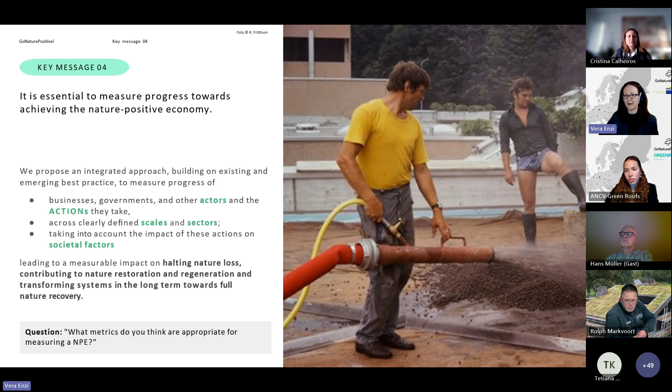So here we would be asking you, what metrics do you think are appropriate for measuring a nature positive economy? Because maybe you also have some further ideas on how metrics could be designed. What we came to basically was that measures and their progress can be looked at from a top-down scanning of metrics and nature positiveness of the economy, but can also be measured by a bottom-up interpretation of nature positiveness and useful metrics. So we are proposing that both ways are necessary.

Yes, some examples how that actually could work. So most of you will be familiar with the SDGs and also, for example, the Task Force on Nature-related Financial Disclosures, maybe also the donut economy concept.

What the nature positive economy concept we are proposing distinguishes from the mentioned examples is that we are proposing a whole of society approach, and not just a sectoral or limited action in scale or actors. So last but not least, the last key message is about the whole of society approach.

A nature positive economy will require legislation to stop environmentally harmful activity and support nature positive actions, alongside voluntary and citizen-led initiatives. It will, of course, respect international human rights, and it will support equity, fairness, and justice.

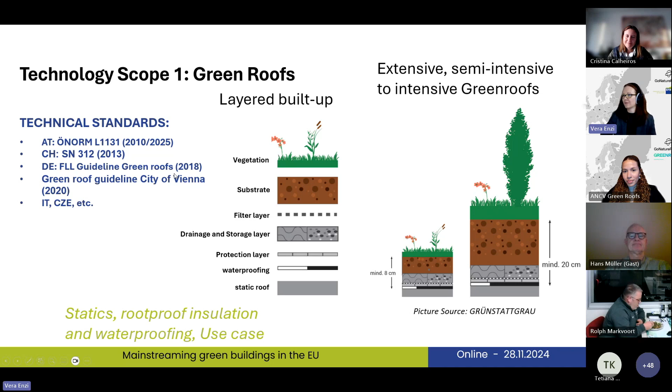So how do these kinds of green roofs look like? I don't know how many green roof experts are actually present today. I hope a lot. So we can also see some recent developments.

We've seen it come together a lot with, of course, the energy demand and solar side. This is, I would say, one of the fastest developing markets we're currently seeing. You see an extensive combination more on the left side of the slide, and an intensive combination on the right side.

Technology scope number 2, forms of green walls. Actually, we don't find as many standards in green walls nowadays as we do on the roof side. In Austria, there is actually a green wall standard as well.

It was published in 2021, the ÖNORM L 1136. It was just translated into English, so it should be available within the next 2 months. We also find the German FLL guideline for the respective sector being used in a lot of different countries.

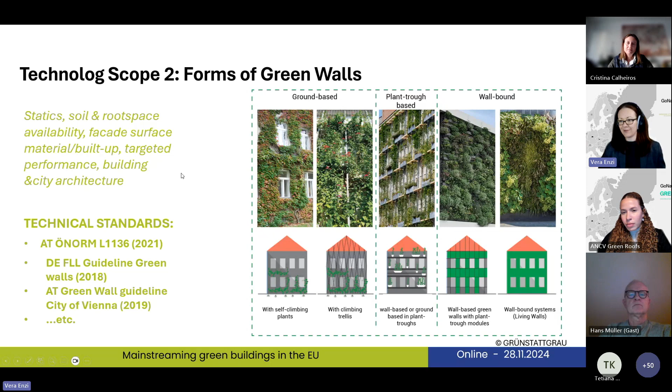Of course, projects are also bound to a lot of on-site conditions: static, soil and root space availability, facade surface materials, build-ups, targeted performance, city architecture, etc. Because facades are very visible in the middle of the street, they must not just fit to the building, but also fit to the streetscape and the overall goals.

That's a nice picture of a living wall system. In that case, it's a modular one, and it can even be planted with self-seeding plants. So this technology too has been developing very fast over the past few years, with a lot of different systems available on the market.

This is a picture from a hotel renovation. Actually it's a zero emission building, and it works mainly with self-climbing plants. And if you look into that picture, you will recognize that you need very good regulations or guidance on necessary maintenance plans.

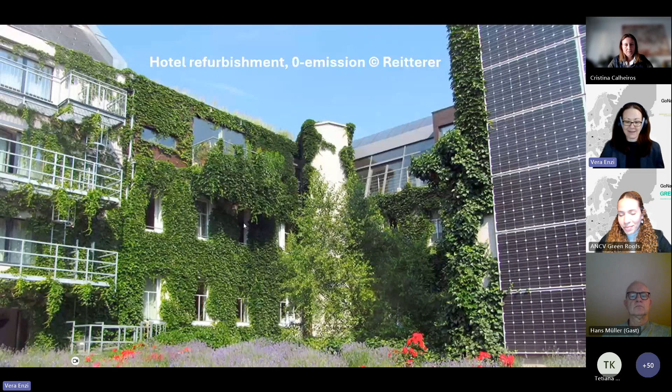Its potentials are very well surveyed. So the story is that around 2014-15, in the European Federation, we started promoting market research and market reporting activities. And there is actually quite a nice approach and method existing on how national markets can be evaluated.

So far, over 10 market reports have already been collected. Apart from one, all of them are publicly accessible - you just provide your email address and you get the document. They are very different in size and content, but they still offer really interesting insight into the different specific markets in Europe, and about the players and the different policies in place from the national scopes.

What I also wanted to mention, something that influences our market currently very strongly, is that we find a lot of suitable directives and policies from a European Commission perspective. For example, the European Energy Performance of Buildings Directive, which leads on a national scale to green roofs and green walls being implemented in the system of energy certification for buildings, also renovation passports, thinking of the current ongoing process of pushing forward the renovation wave.

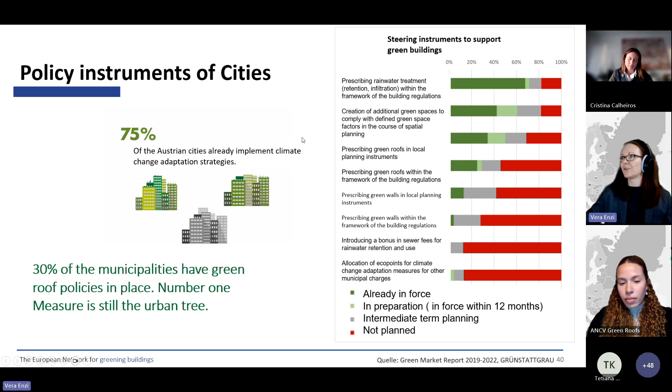But we also see some measures that are still quite new to the Austrian market, like introducing a bonus on sewer fees for rainwater retention and use, or the allocation of eco-points for climate change adaptation measures for other municipal charges. These would be two examples of steering instruments not yet used in Austria, but we can already see some in preparation, so in the next 12 months we see potentially some first developments.

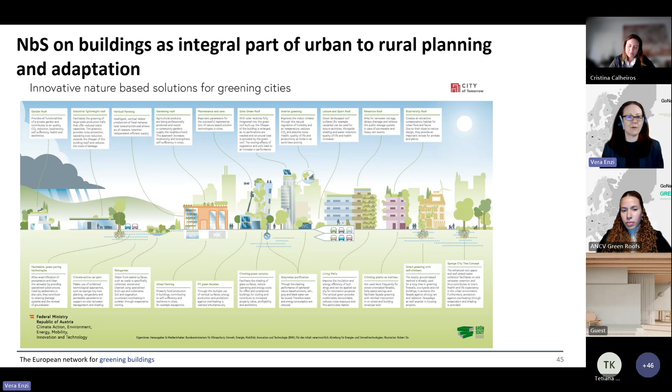This slide is a bit small, but it actually contains a link, so if you look at the presentation later you can explore it in more detail. It shows that we have a lot of different green roofs—garden roofs, industrial lightweight roofs. We can also work with vertical farming inside and outside of buildings. Solar green roofs of different kinds are more and more on the spot, along with retention roofs, roofs dedicated to biodiversity, permeable green paving, and climate-active design of, for example, shopping malls or parks. Rain gardens get more and more popular, and we see first integration of rain garden concepts into green facades, considering the root space of climbing plants. We're also seeing trending projects refurbishing glass buildings with green curtains—climbing plants—to change the energy balance of buildings. There's a lot on gray water, even waste and black water purification integrated into systems. Sponge city concepts, for example, get more and more integrated into our technologies—a green roof is one of the solutions of a sponge city concept.

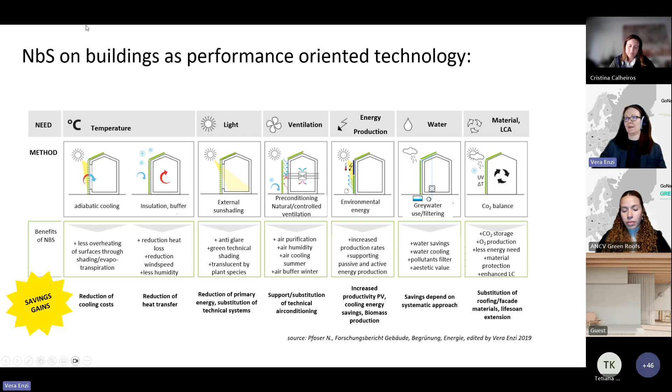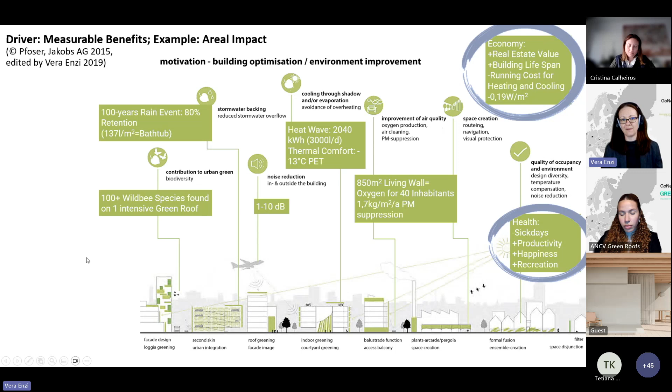What we've learned really well is that nature-based solutions on buildings are a performance-oriented technology, and we can tailor our projects to the needs of the building—temperature, light, ventilation, energy production, water, material, even life cycle analysis and carbon balance are already a topic in the industry. We know we can create savings and gains for our customers, and we're getting better at selling and implementing our technology in relation to the performance a building needs. But not just this aspect—which is important if you want to explain and do a good project for an investor—but also, looking at many cities, the contribution to urban green, stormwater buffering, noise reduction, cooling through shadow and evaporation, improvement of air quality, space creation, quality of occupancy and the environment. So a lot of nature-based solutions benefits and co-benefits that we can have from implementing, and our industry is adopting to that.

I'm already a bit late in time. Maybe we'll shift our look at Mentimeter back once I can check what you've answered. But at this point in the webinar, I want to make you aware that we have the fourth question on Mentimeter already active for you, which is: what other nature positive use cases in our industry can you spot? It's about 6 o'clock, so we're now changing to some nature positive use cases that the team from EFB and ANCV has identified in the project. While you work a bit on Mentimeter, I'll take you through a few examples we spotted, for nature-based enterprises, projects, services, but also products.

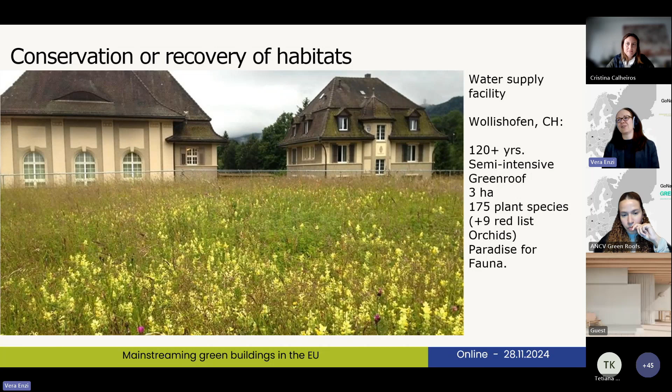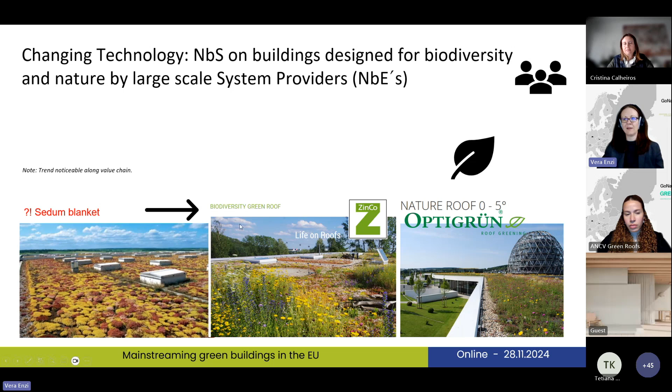A second trend or hint of nature positive I've seen looking into our industry: we all know we have nature-based enterprises that also provide technology or systems for green roofs and green walls. I think green roofs became more industrialized in the 1980s. The picture was more like a sedum blanket, an extensive green roof vegetation, for many years. But basically all the system providers in the last 5 to 10 years have changed their portfolio to also offer biodiversity green roofs, nature green roofs, that come with a lot of different features for birds, beetles, bugs, for water retention, also in combination with solar. So I'd say this is a nature positive development our sector is having.

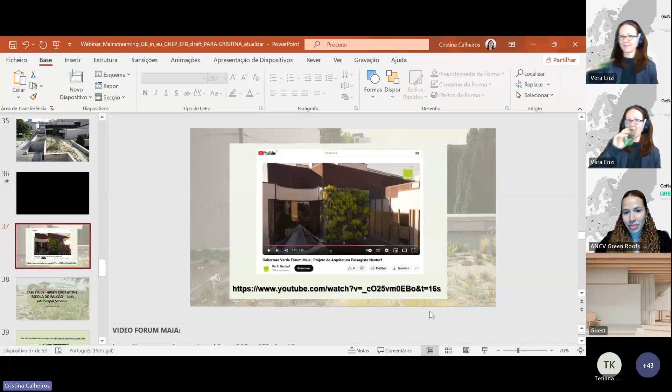Thank you very much, Vera. I will start to share the PowerPoint. Thank you very much for the organization of this webinar, and thank you, Vera, for your nice presentation. That was really important to have that framework in order to understand the project and what we are talking about in the end.

I will talk a little bit about examples of natural materials. We are talking about nature positive, and these are some case studies I'm going to share from Portugal. But before that, I'd like to highlight again that part of being nature positive is also the materials that we use. We heard Vera talking about nature-based solutions and how they can be incorporated in the building, outside, on top, on facades, inside the buildings, around the buildings. But the materials are really important too, because it's not because we have plants or it's green that it's sustainable or ecological. So to evaluate the life cycle assessment of the materials and take care of that issue is really important.

With that, I'm going to show a real case project that's already finished: Green Urban Living. That was based on looking for a material that could be used in the drainage layer. We saw Vera showing the layers of the green roofs—one of the layers is the drainage layer. So this project looked for a material, in this case cork, a cork-based material.

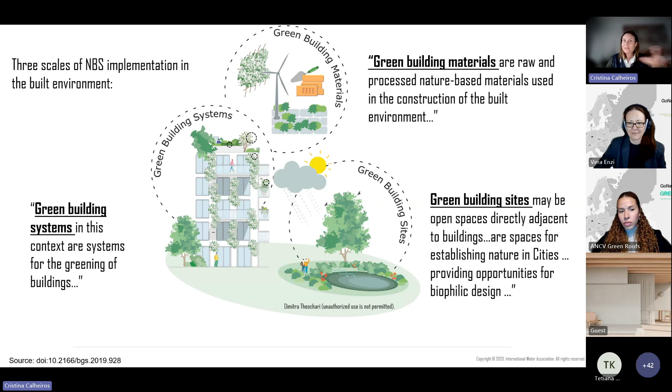So it's not just because it's green and sustainable, we have to go further and deeper on the materials. This is the project I was talking about, the Green Urban Living, that searched for a material to be used in the drainage layer, and this material was cork.

Cork is extracted from a tree, the cork oak tree. It's very interesting because it has high performance in terms of thermal, acoustic or noise reduction, drainage and retention functions, and also anti-vibration and insulation features.

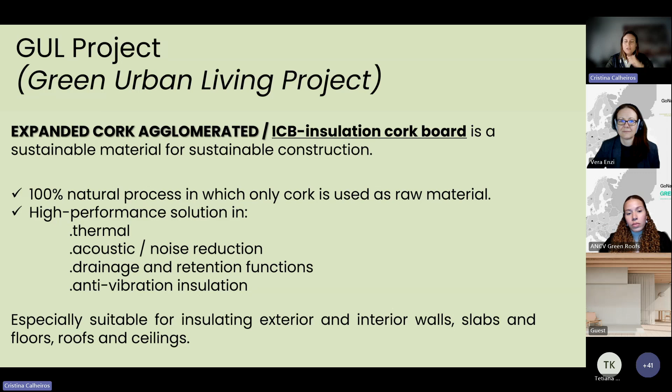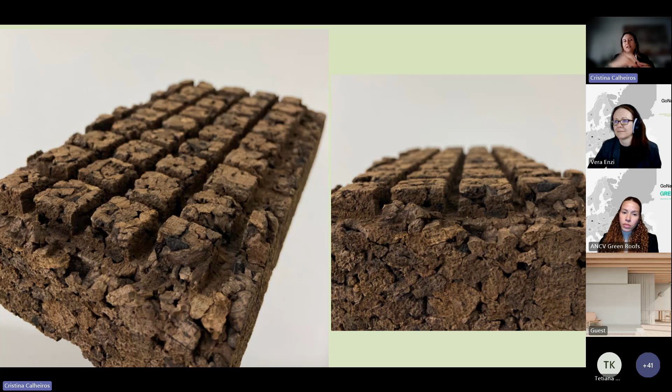We can use cork as an agglomerate board. I will show you, like this. The cork is extracted from the tree, we have an agglomerate, and then we can transform the agglomerate into this board. This one is the specific one to be used in green roofs because it has these strains, these lines, where the water goes through.

So this is the question: can we have the same performance on a green roof, or even better, using natural materials? So that was all about this project.

It was co-supported by the European Union, and several companies were involved. The main objective was developing an expanded cork agglomerate to be used as a drainage layer. We also wanted to highlight the importance of insulation, related with the climate change impact.

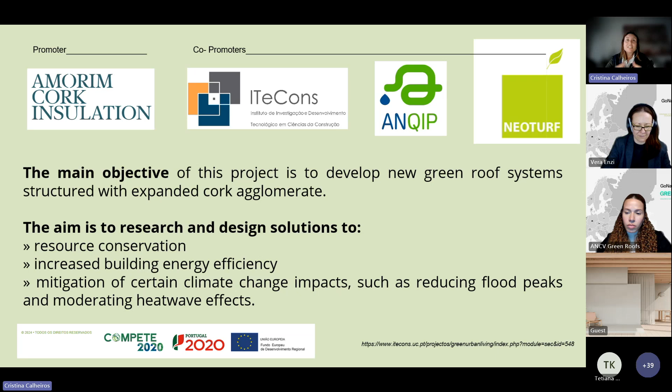When we have heat waves or a peak of precipitation, how could this board respond? These are the trees - if you don't know, it's the Quercus suber tree, and in Portugal it has a long history and prevalence because we have around 1.2 million hectares with these trees. It's also very important in terms of jobs, with around 12,000 people engaged in this process.

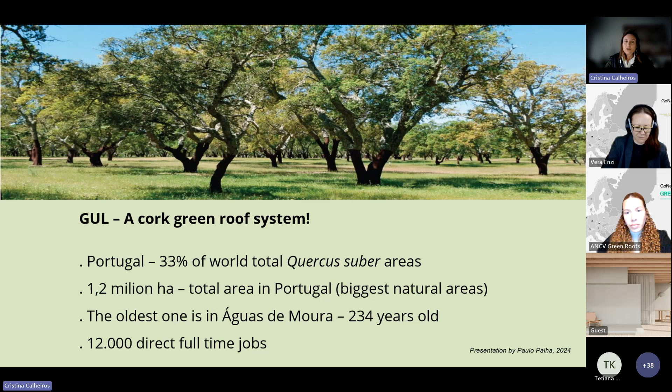There are other places in the world that also have Quercus suber, but in Portugal it's really representative. Part of the extraction is used for cork stoppers, but it's also used a lot in construction - part is used for cork stoppers in wine bottles and others.

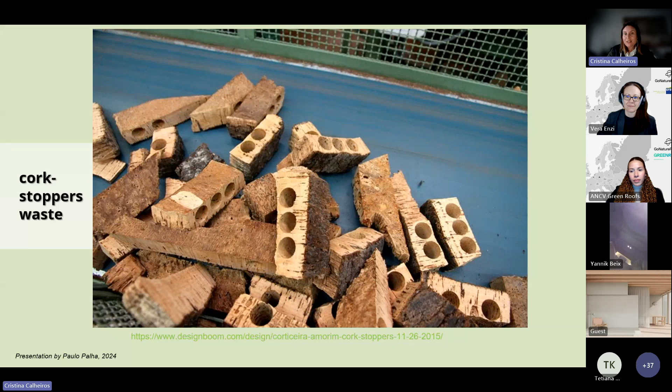So I put it here, cork stoppers waste, but this is not waste - this is also like a subproduct, a material very interesting, because in the cork industry, everything we can use is of value. Even the dust has value from the cork.

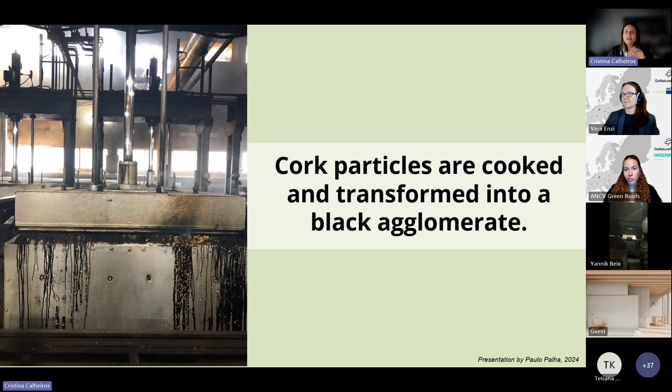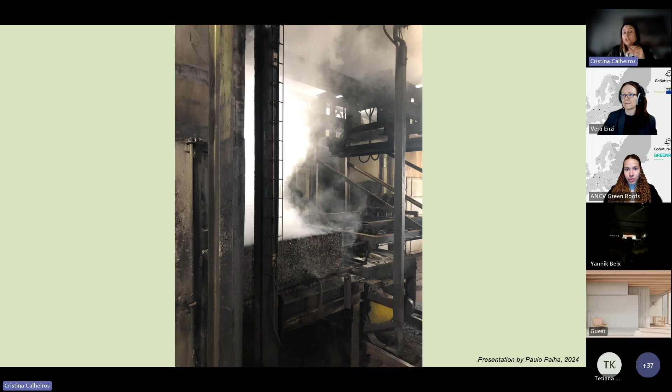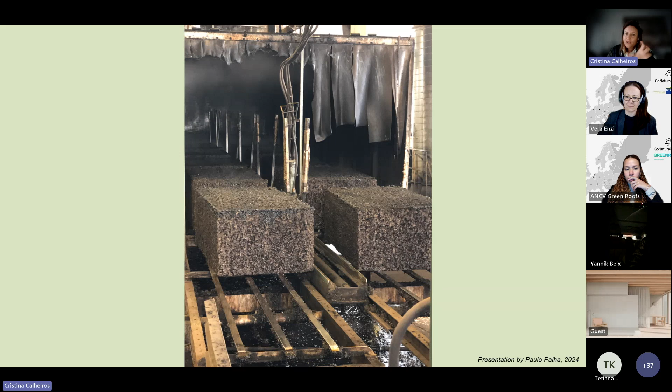So this is the production site, the factory, where the cork particles are cooked and transformed into a black agglomerate, because they go into an oven and go through high temperatures. What happens is this is what it looks like - we have the agglomerate that releases suberin, which is the natural glue, so they are all connected in a natural way. This is how you see the photos from the factory.

After this production, those lines that we saw before are made, and we can have different dimensions of the cork board.

As I said before, in the schematic representation, we have the plants, the technical substrate, filter layer, and then the cork board - the ICB, also called insulation cork board, that's the same, and then the slab. This is very interesting because, as you see on the right side, you also have different shapes available.

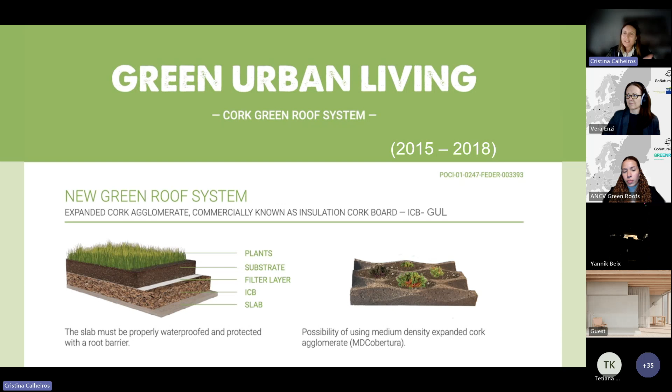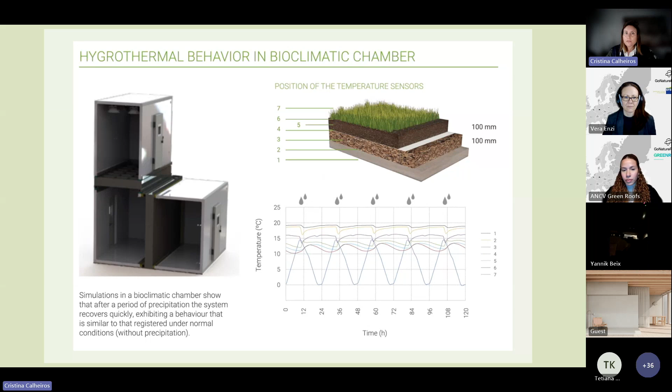I will go through this very briefly, but just for you to know, a lot of scientific papers have already been published related to the hygrothermal behavior. You can look, and if you want, you can ask us and we will provide them. All of this has been under research.

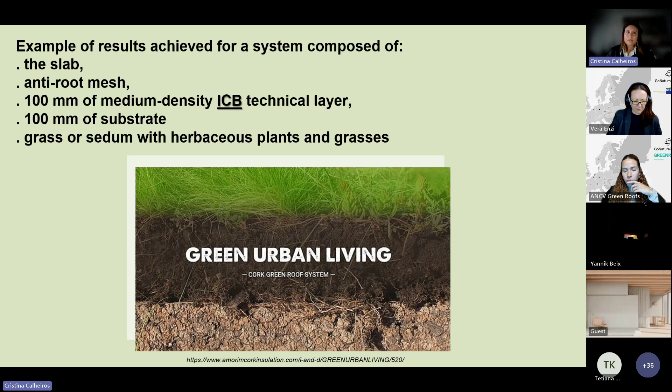There was this standard roof that was built with the board - 10 centimeters of this cork board, 10 centimeters of substrate, and then herbaceous plants on top. Several tests were made concerning retention capacity, in this case 17 liters per square meter, which is very good.

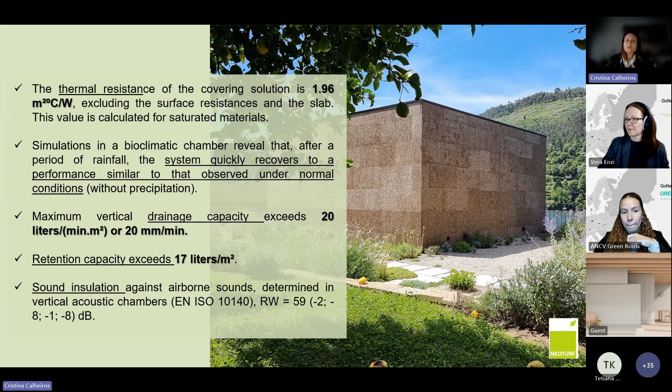The sound insulation was also evaluated, and thermal resistance and acoustic performance were also looked into. We don't have much time to go deeper into this, but we can provide these studies, as I said.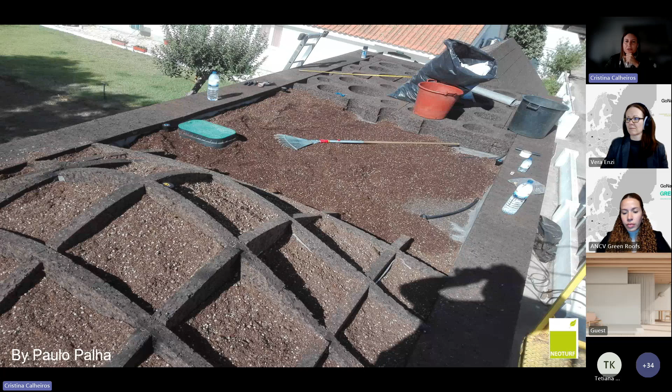This is another view of a different green roof showing the different stages of implementation, here with the covering of the plants. As you see, it's very interesting in terms of landscape integration.

So this was the development of the material, the drainage layer. And I will give two examples of the application. One is in a municipal building, that this building is now converted into a living lab.

Some highlights: this green roof has different heights of substrate, varying between 15 and 30 centimeters, because we have different plant types. We have smaller plants, but also shrubs, so we need more substrate in some parts. It's a very diverse and interesting green roof that has this system, the cork board.

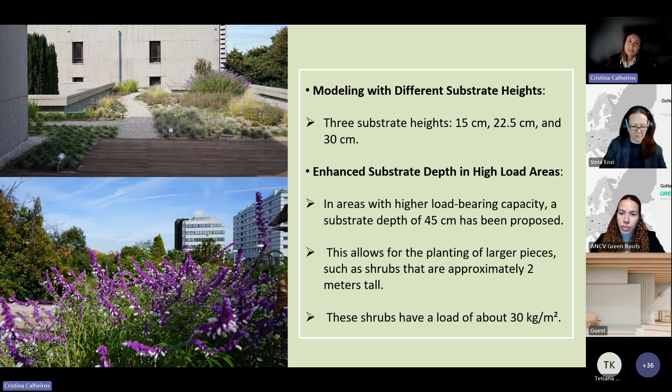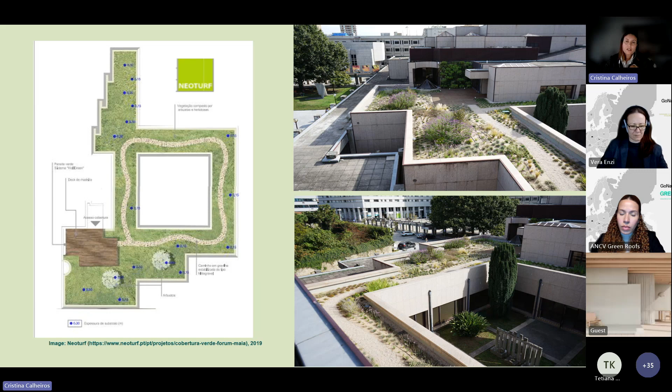So this is the plan. Not all the building was covered with the green roof, but that is the intention of the municipality for the next stage. So these are some of the plants that were considered, local plants adapted to the climate with low maintenance, which is also very important.

Here you see the irrigation system. This green roof is low intensive in terms of water management, because the irrigation system needs to be there, but it was only used in the setup phase, the initial phase, and then when necessary in extreme events, when it's very hot. Otherwise, water use keeps to a minimum, which is also why it's a sustainable system.

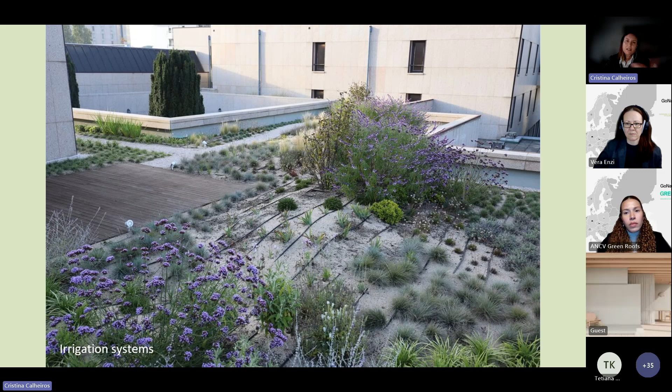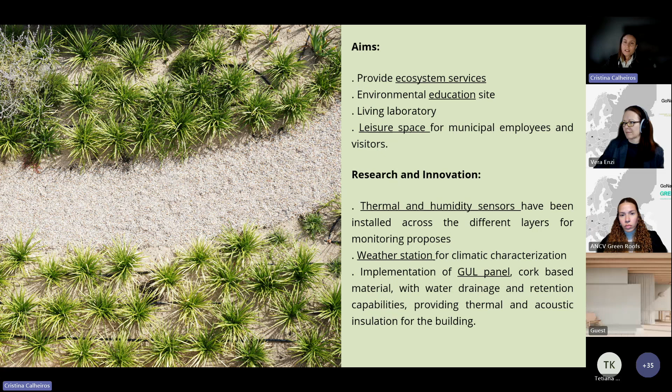And now it keeps on with research related to thermal and humidity sensors. So we are monitoring some abiotic parameters, and also have a weather station. As you see, these are some other photos, and I will share this video with you.

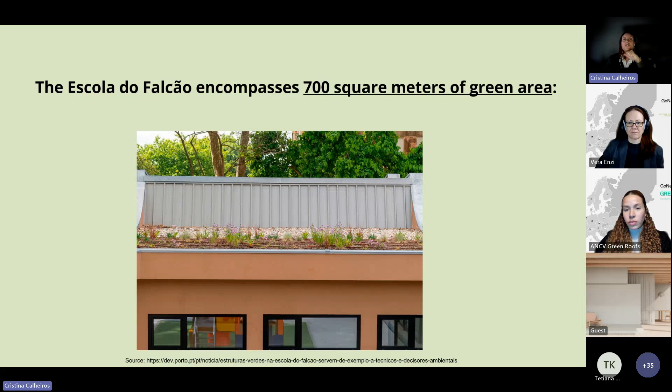The other case study is also a municipal building. It's a school, and it was retrofitted in 2023. It's around 700 square meters of green area, and it was very interesting because the main aim was to promote thermal comfort for the students and staff, improve energy efficiency inside the building, support local biodiversity, and also integration in the building.

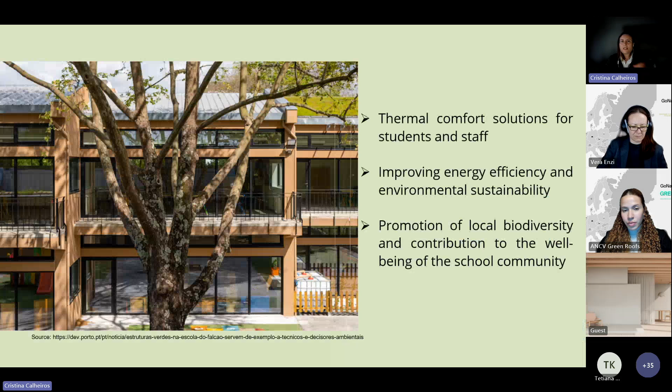You can see on the right side there's a green roof with a slope. Another green roof is a biosolar roof, and here the aim was also to produce energy to be used in the school. This was following all the technical guidelines, and it's already implemented and producing energy.

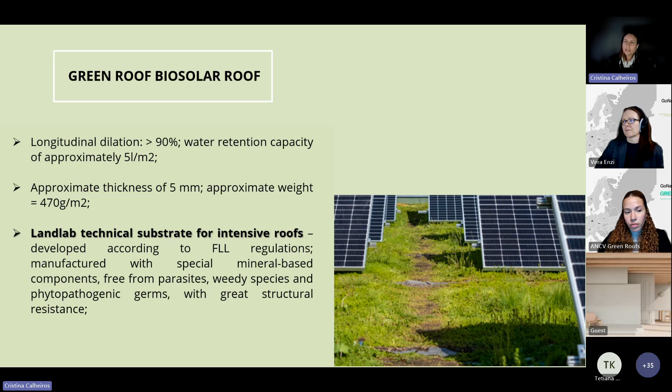These are some of the phases of construction. And this is another green roof, a complete horizontal green roof, and as you see, also the irrigation system. In this case, it was used also the GUL system of the cork, and several species were used, mixed with sedum carpets.

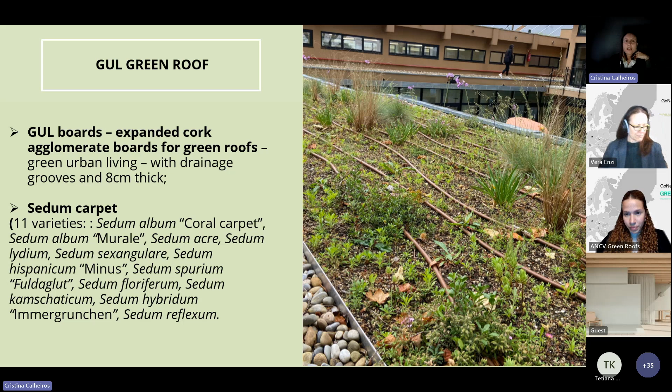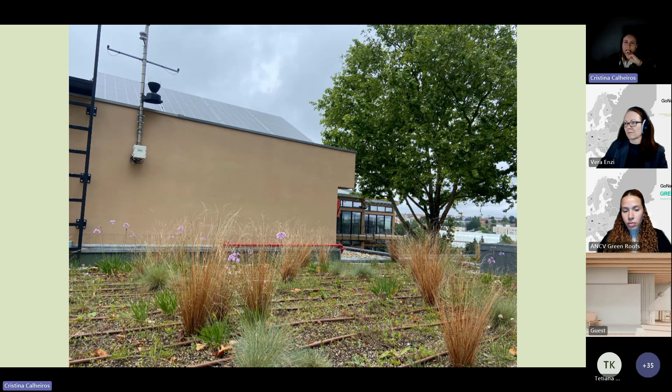Some highlights here: you can see on the left side the climatic station for monitoring. So in both case studies we are monitoring some parameters. Then this one we have a closer look at the sloped green roof.

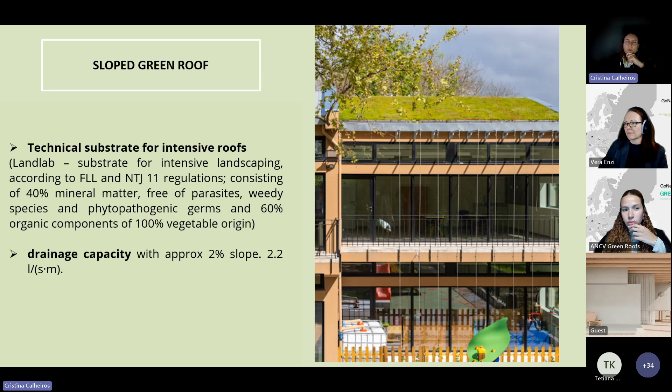We have sensors on top of the green roofs and inside the building, because we are comparing the efficiency of a classroom with a green roof versus a classroom with a conventional roof, under the same conditions. We hope to bring more results in the near future.

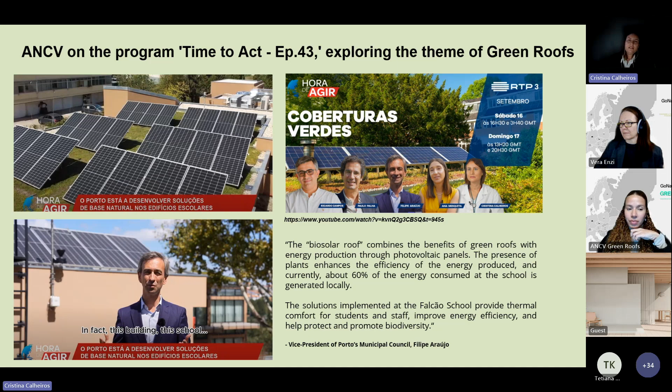Here is another example, and this is very interesting because it caught huge attention from the media and from several programs, because this is leading by example. For the municipalities, both Maia and Porto, this is very important, because it's leading by example, and the next step is to replicate these systems.

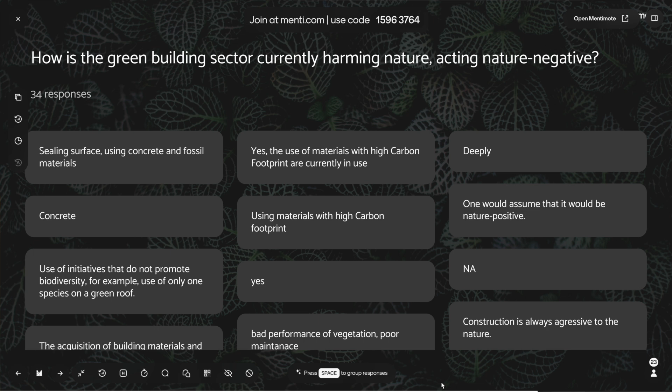Yeah, the thing is, there are a lot of results. Yes, it's great. So you gave us a lot of different hints. Some of them were, I think, also quite new for us.

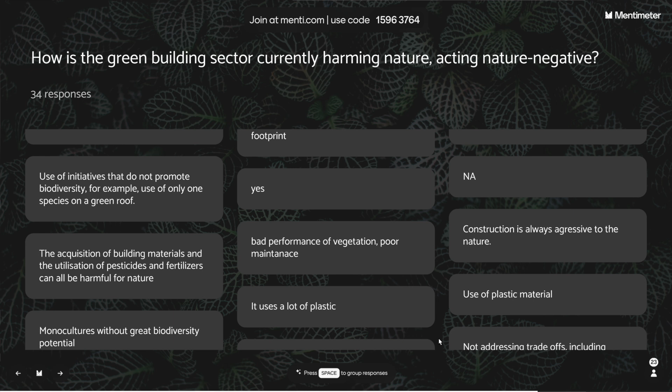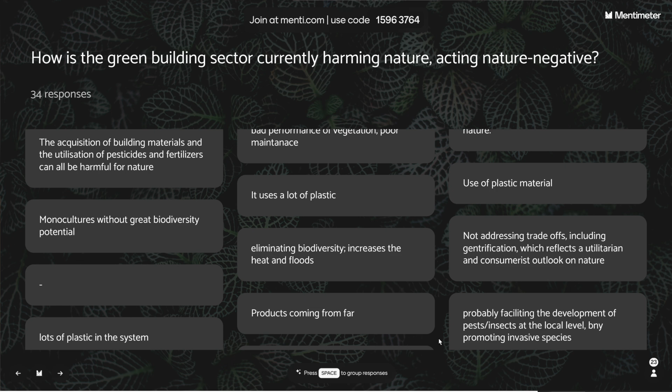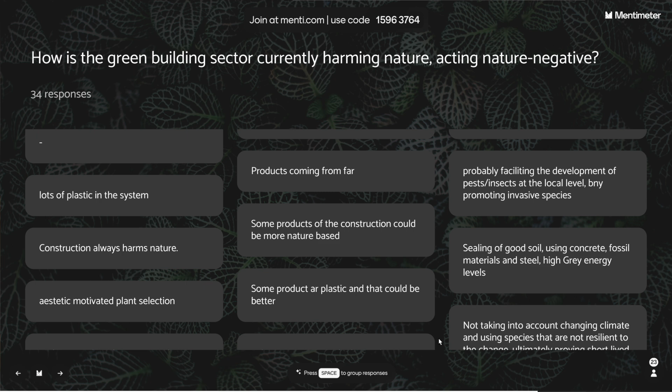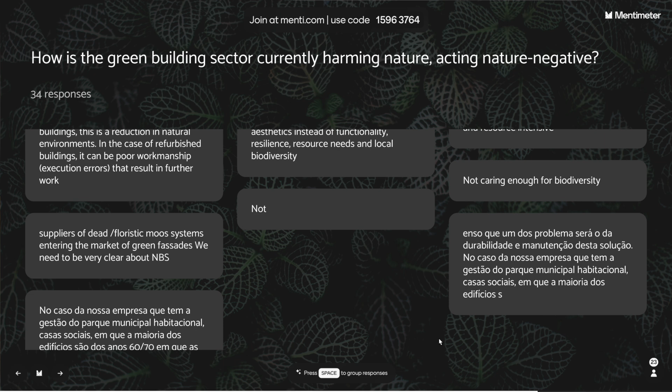We have to reflect on what materials we are currently using, what the carbon footprints are, not just in production but also in transportation. Part of the survey result was that building new buildings as a general habit is always going along with nature destruction and an increase in land use. So for our whole market, pushing for a refurbishment market rather than new buildings being built is a really powerful and important nature positive move.

If we create bad performing projects in terms of vegetation, in terms of build up, etc., that would be rather harming than acting nature positive. That's clear, so thanks a lot.

If you're interested in the results of the survey, we are really happy to share them with you afterwards. It was said today already that we are organizing today's webinar in cooperation with the Connecting Nature-Based Enterprises platform.

I think that's really important for those of you who are not yet members of the Connecting Nature-Based Enterprises platform, so I'll put this link into the chat. Don't hesitate, it's an open community. It's actually really cool, we're building up a nice spot where we can share our best projects, collaborate and work together on this nature positive topic over the next couple of years.